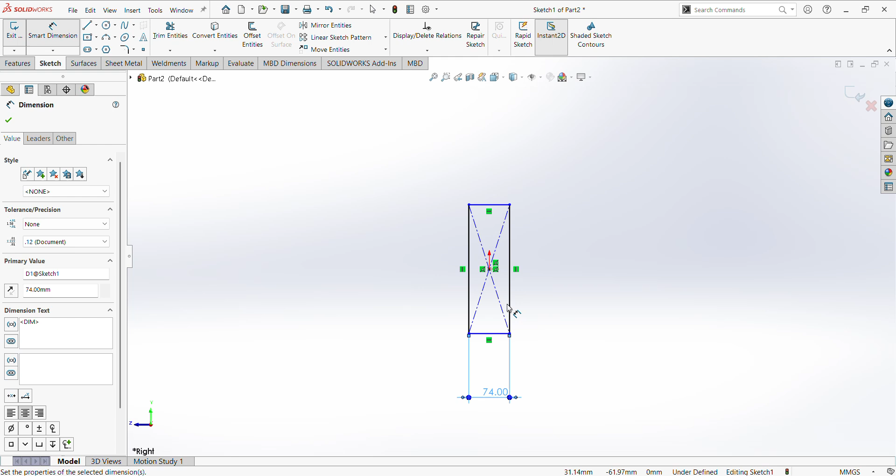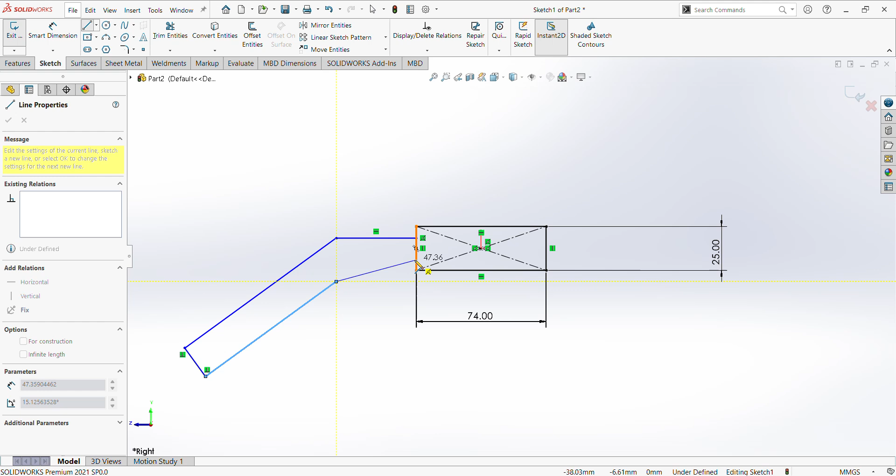Select line, just create a rough sketch, give this horizontal constraint, drag this down, give the dimension here, this is 20 mm, and you can see here there is a 30-degree angle.

Give the parallel constraint here, give the vertical alignment, and this dimension here to here is 12 mm.

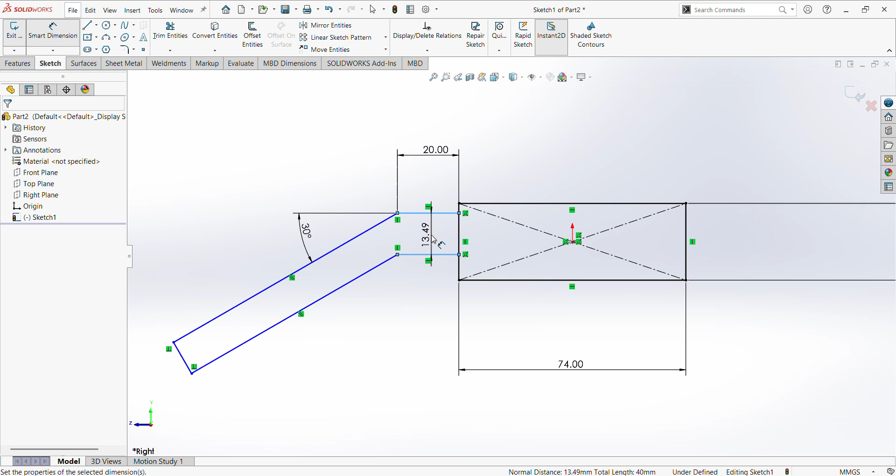This is also not needed here. Or give from the center point, this is 6 mm. Next, this length we need, this dimension is 75 mm.

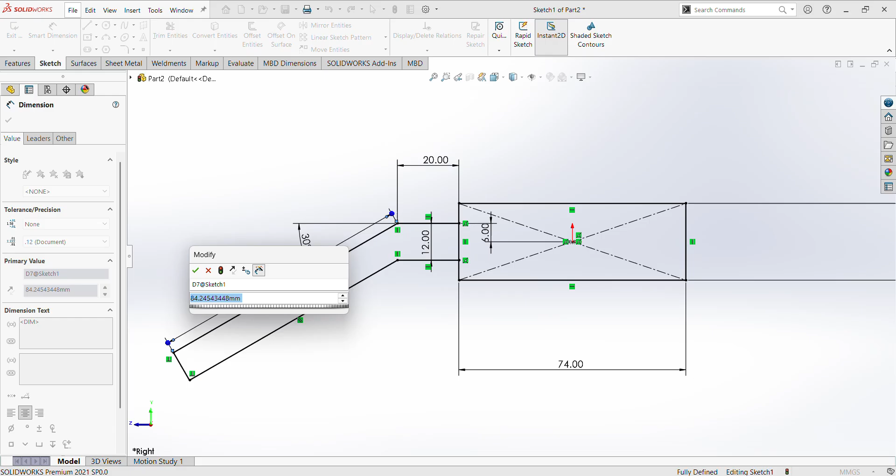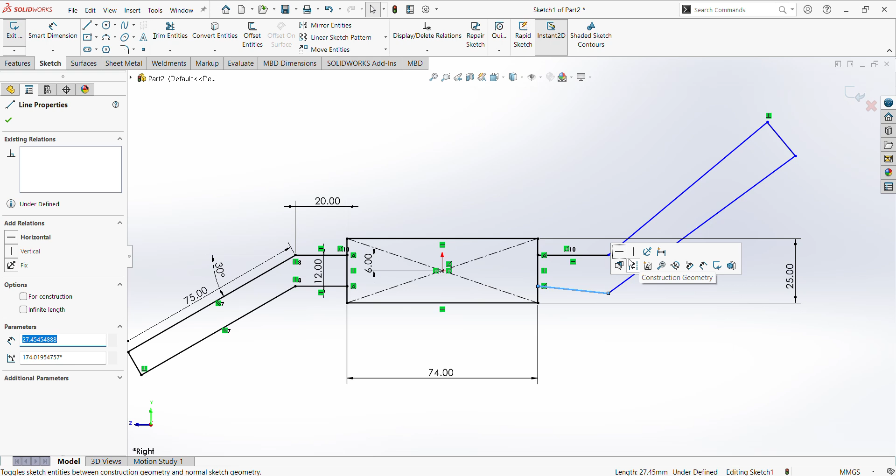Same, create the right side also. Give the horizontal constraint, give the dimensions, this is 20, and here to here angle is 30.

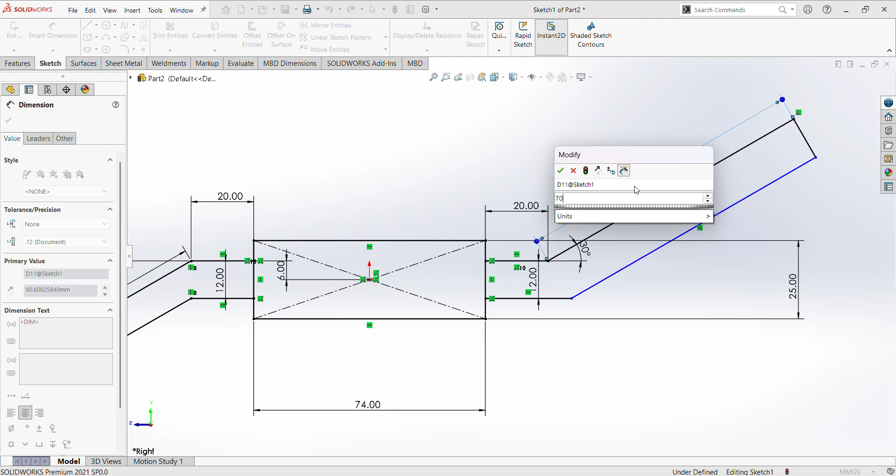Give the parallel constraint here, next give these dimensions: 12, this overall length is 70 - sorry, this is 69, this is 75 and 69.

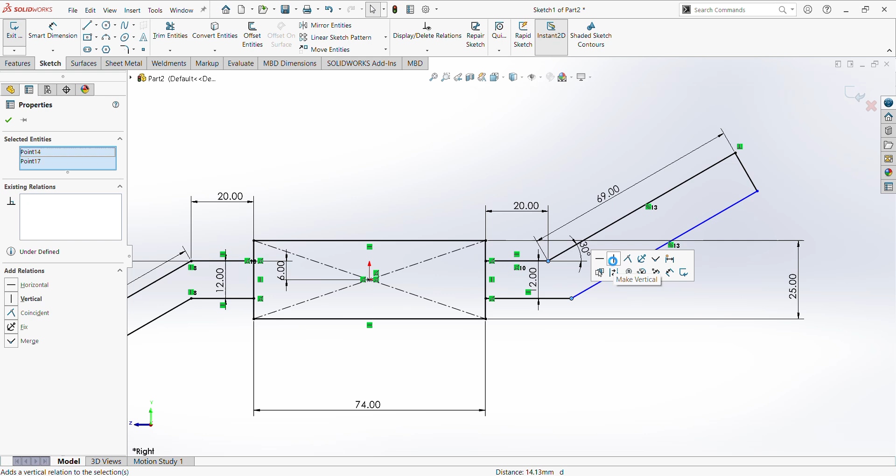Select this and this, give the vertical constraint. That's it, sketch is fully defined. Finish sketch.

First select this one, here select mid plane, the dimension we need is 65 mm.

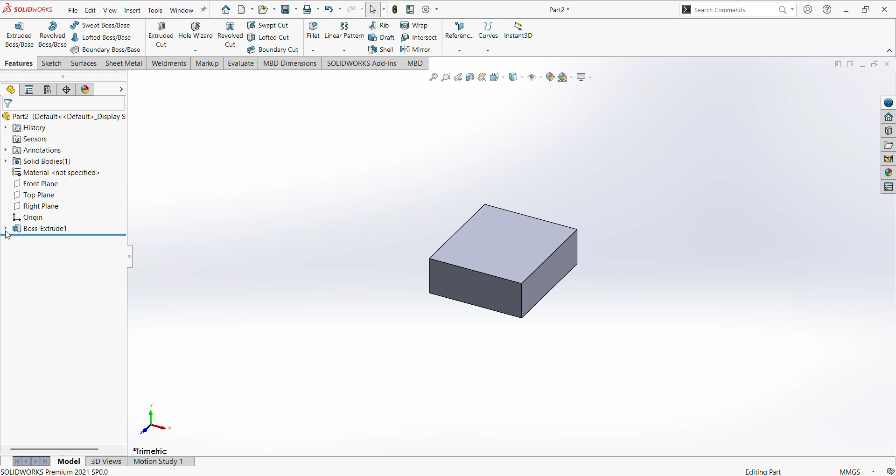Next select the same sketch, extrude, select this portion, make symmetric, the length is 50 mm.

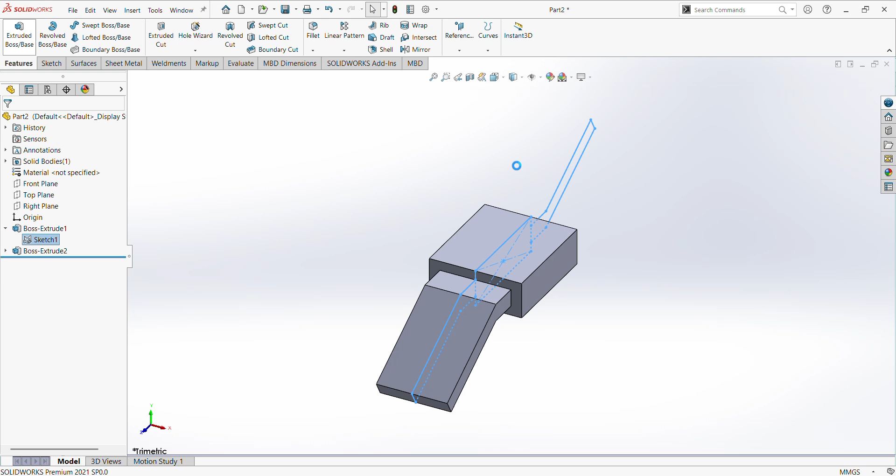Next select the opposite side, make symmetric, 50 mm is okay, finish. Control 7 for ISO view.

Next create the fillets, there is an R10 fillet on the 4 corners.

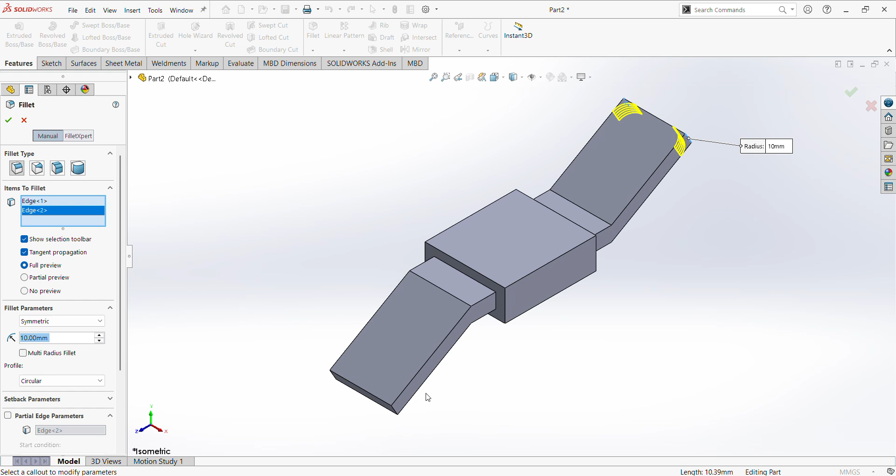Next there is a center cutout, select this surface, sketch, the cutout dimension is 40 by 40, and also a 10 mm chamfer on the 4 corners.

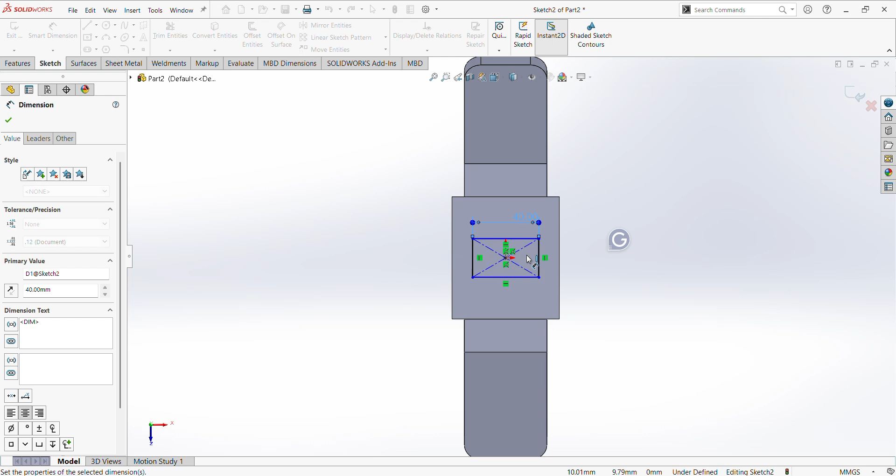Create center rectangle, give the dimensions, 40, finish sketch, extruded cut, here select up to next, okay.

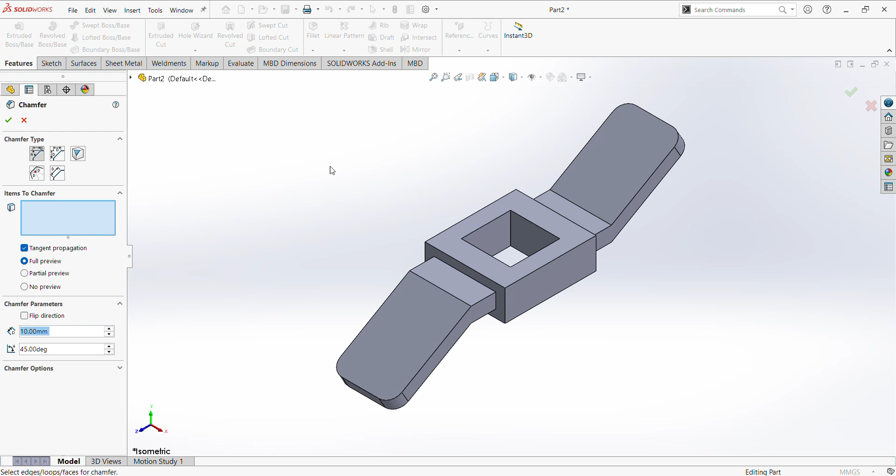Control 7, create the chamfer here, the dimension 10 mm is okay.

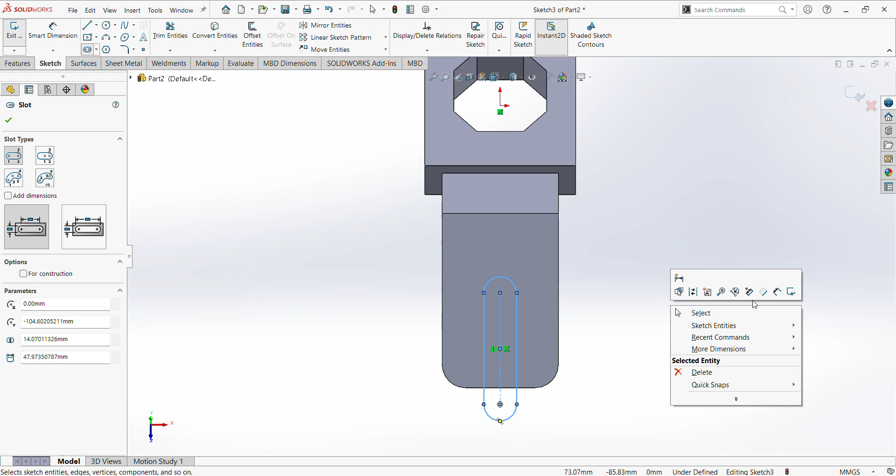Next this side there is a slot cutout, select this surface, sketch, create one slot here, give the dimensions. You can see the slot dimension, length is 50 and diameter 15 mm.

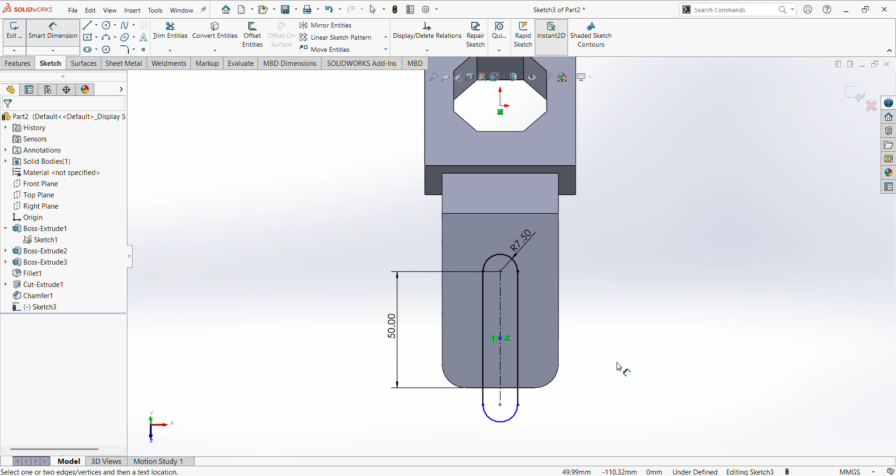Here to here give 50 mm, and this diameter is R7.5. So this is not required, or we can give the condition also here. That's it, no need for other dimensions, finish.

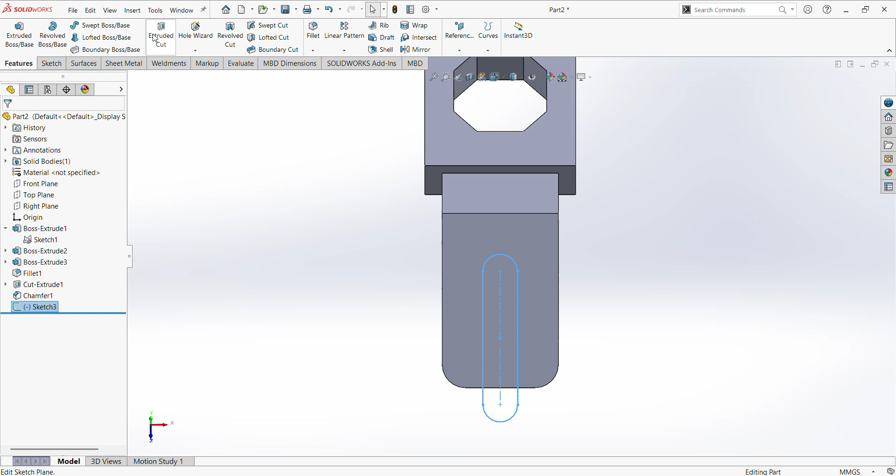Select extrude, extruded cut, here give through all, okay. Control 7.

Next in the opposite side there is a dia 10, 4 holes, pitch is 35 and 30 mm. Select here hole wizard, select simple hole, drill sizes, diameter 10 mm, through all.

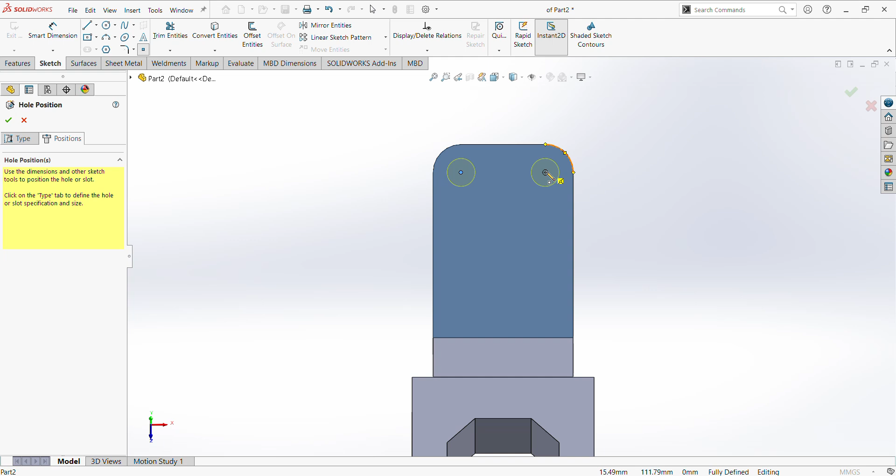Select positions, first select this face. So we have an arc shape here, so we can get the point for 2 holes. Another 2 holes we need to make the dimensions. Give the dimension, this is 35 mm.

Let's try with the constraints, give the horizontal constraint here, vertical, this is also vertical. You can see sketch is fully defined, finish.

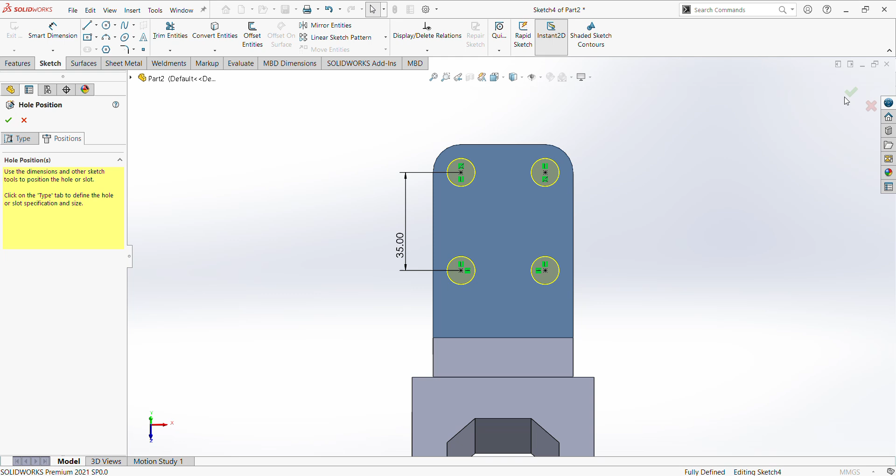And also here 4 holes is there, that diameter is dia 9 mm through hole. Select same hole wizard, simple hole, change the dimensions, drill dimension, through hole, everything is same.

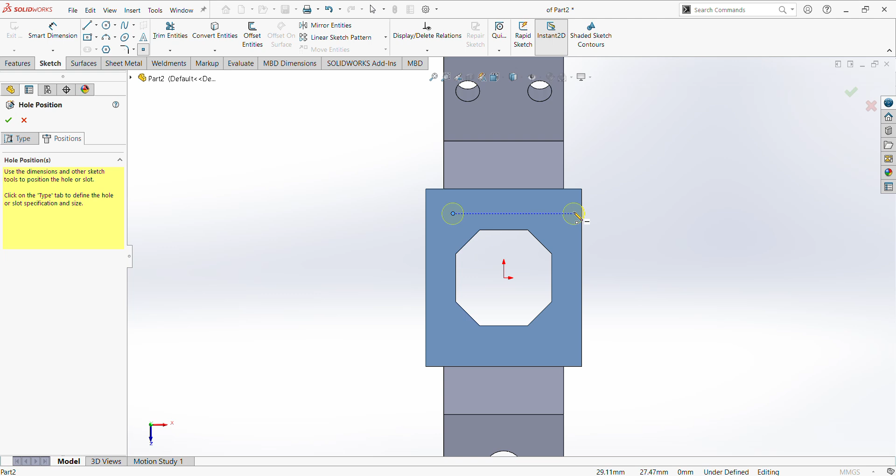Select the positions, first select this surface, place 4 holes. The pitch of the holes is 54 and 44 mm. This is 54 and this is 44 mm.

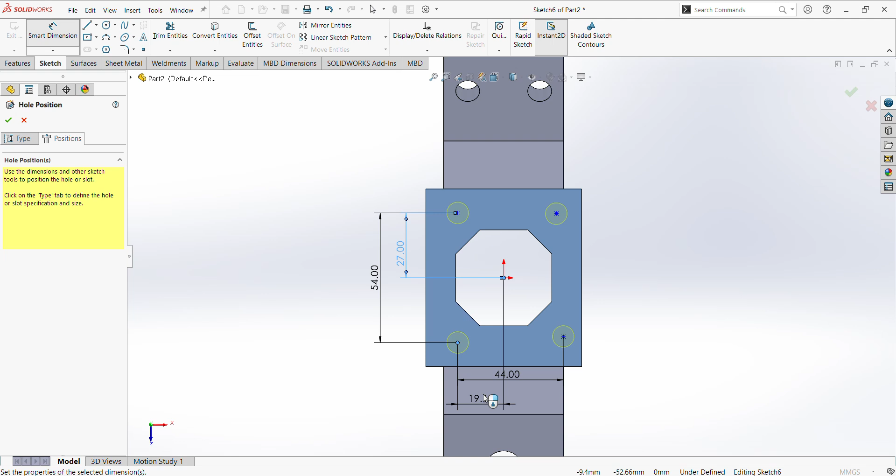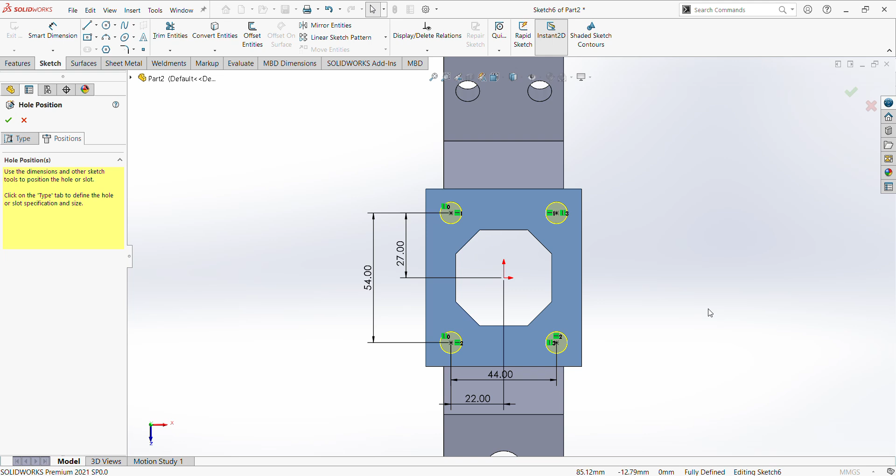Give from center also. Give the constraints here. That's it, you can see sketch is fully defined, finish.

So that's it friends, assign the material here. Edit material. So these are all the standard materials. Select aluminum alloy 6061 T6. Apply.

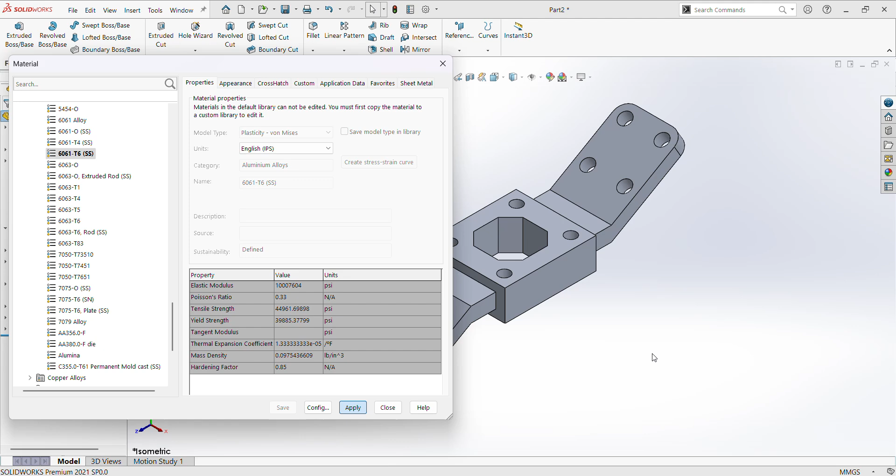Go to edit appearances, assign some different color here. So you can change the inside cutout color to identify.

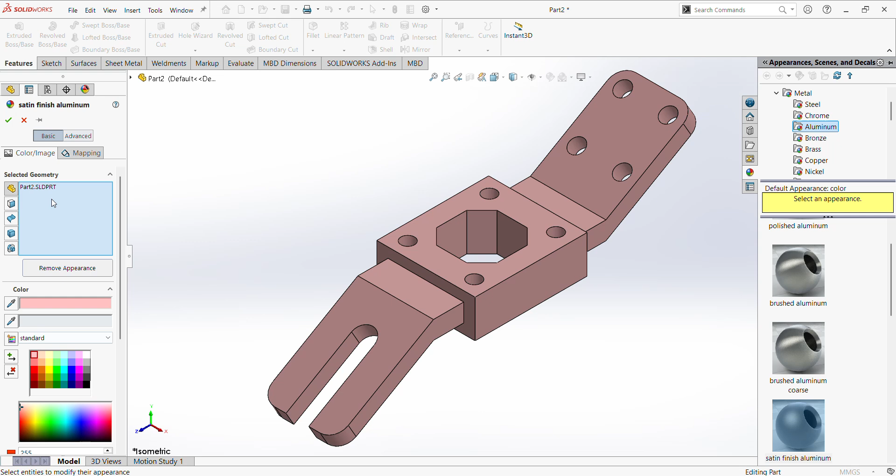Remove this first. Select here features, select the features here: holes, cut, chamfer also cut, fillet is not required. That's it. So this is missing.

Select this chamfer also. Okay.